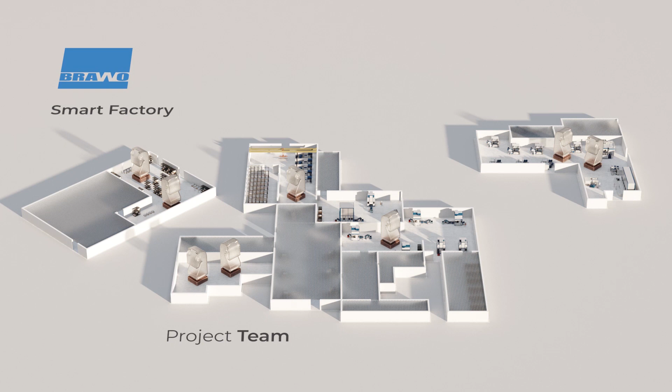The Smart Factory project aimed at increasing the digitization of processes, technological innovation, and corporate sustainability was launched in Brawo in June 2021. A dedicated project team was set up to achieve this ambitious goal. 8 project managers were identified from different corporate positions. They all have different skills and experiences and share a strong attitude for innovation.

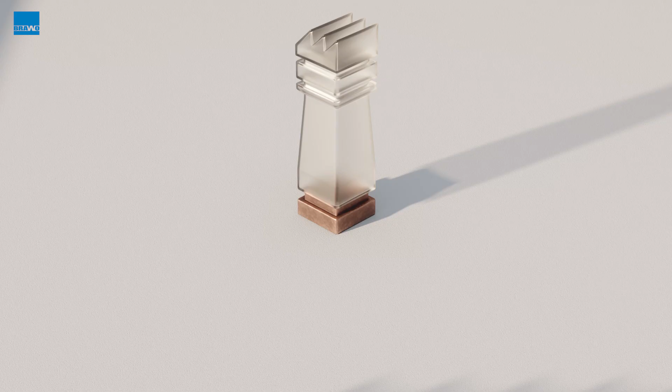Through periodic meetings, new proposals and the status of projects in progress are shared with the company management. The main projects of the Smart Factory regard 5 macro areas: energy management, production and maintenance, paperless documental management, communication and management flows, business intelligence. Each macro area contains several sub-projects for a total of over 50 dynamic projects that may change over time. Let's now see in detail some of the projects that are contributing to the transformation of Brawo into a smart factory.

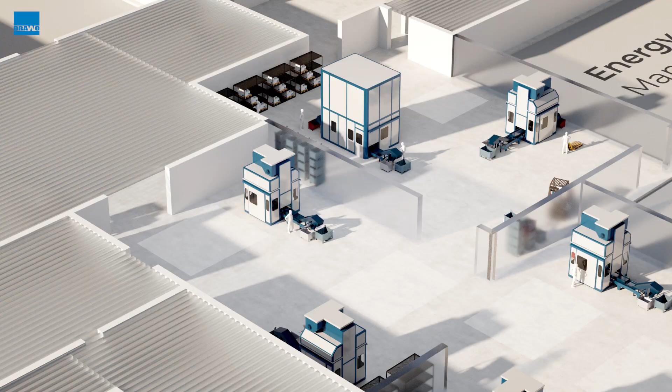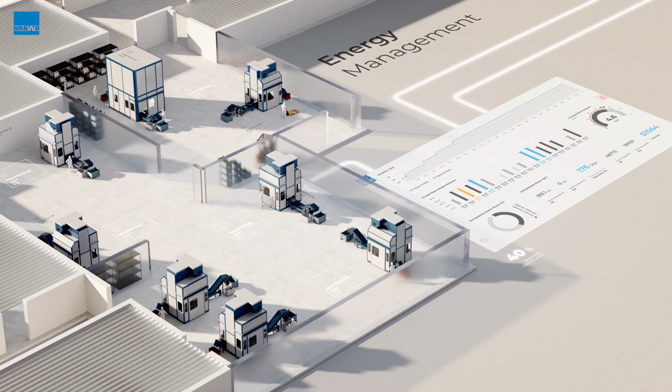The installation of specific sensors allowed to intensify the collection of data relating to the individual equipment and company areas' consumption. The information collected is monitored and analyzed using special software and apps that are able to intercept consumption anomalies and send alert notifications to the relevant personnel. This allows Brawo to promptly intercept malfunctioning notices and intervene to resolve them.

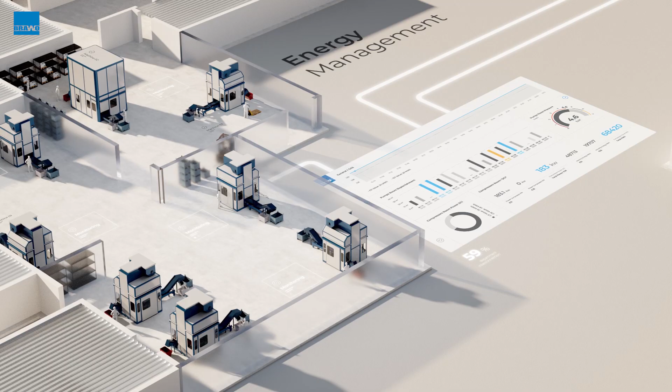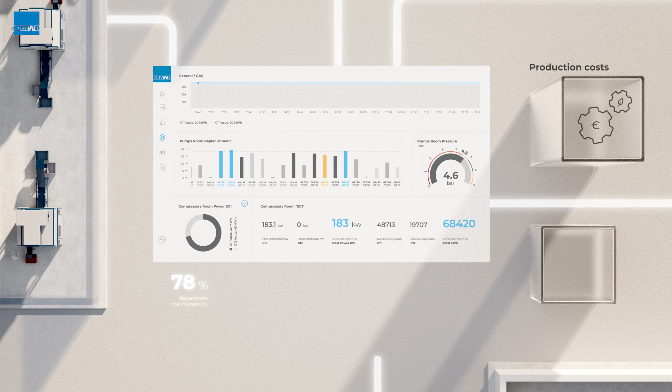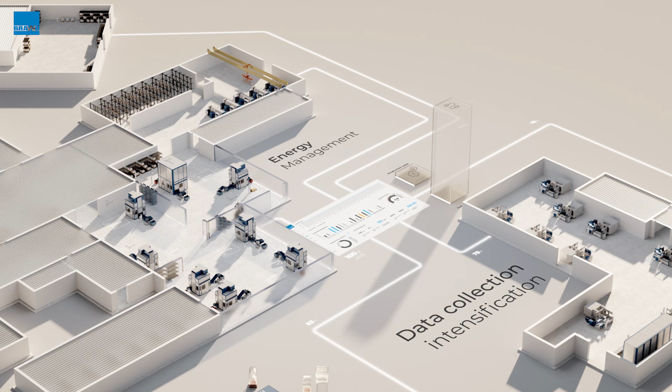It's also possible to analyze in detail the data relating to corporate consumption of utilities by intercepting inefficiencies and implementing improvement actions aimed at reducing production costs, environmental impact, and increasing sustainability. Considering the growing strategic importance of these topics, Brawo scheduled an intensification of the collection and monitoring of data relating to company consumption, including an ever-increasing number of company equipment and areas.

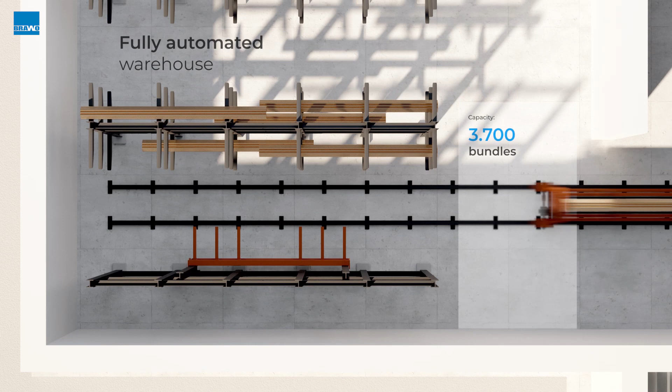Another fundamental aspect for Brawo's production process is represented by the management and handling of the raw material. A fully automated warehouse with a capacity of up to 3,700 bundles was installed. Through the interface between the warehouse management software and the company MES, it is now possible to manage in a completely automated way the handling of the raw material.

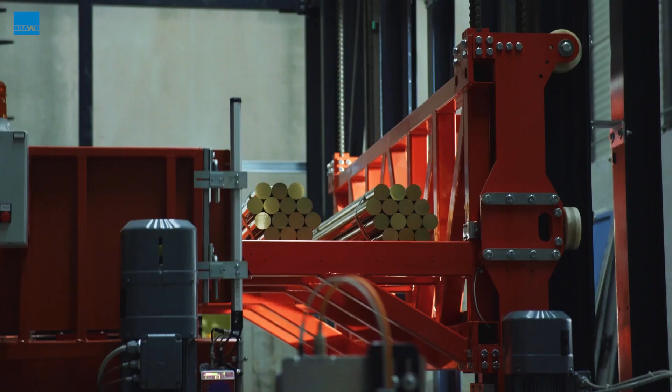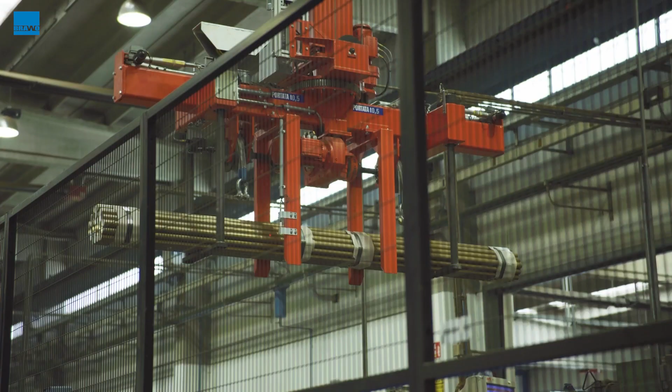In relation to the production needs, the bar bundles are picked up and positioned on the machine for the cutting operations without any operator intervention. Thanks to this project, it was possible to eliminate the manual operations of the cutting machine's loading, and in general to increase the efficiency of the raw material handling and storage.

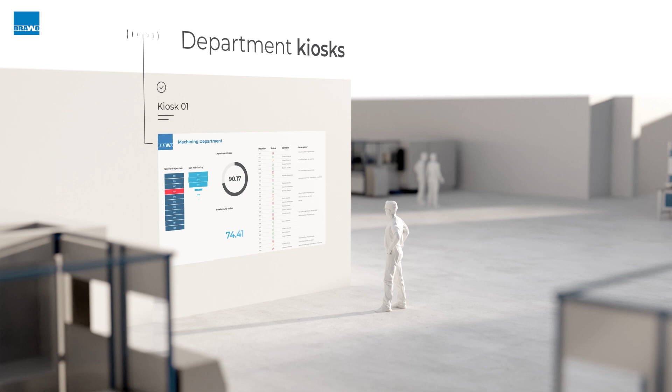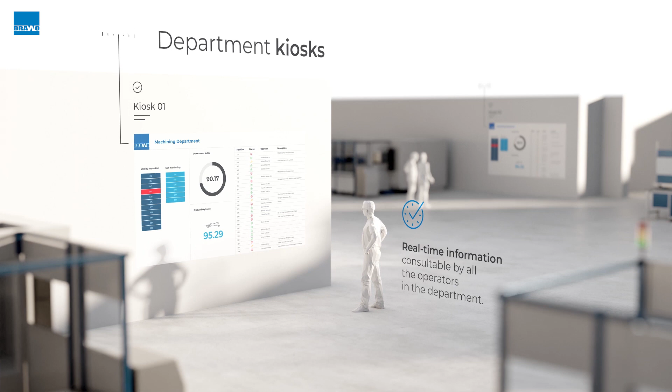Monitoring production performance is the key to achieve the company's goals. In the machining department, 2 screens of 75 inches illustrate real-time information relating to the status and performance of each machine. An 80-inch touchscreen monitor, which can be consulted by the operators, displays the trend of the department indicators in real time.

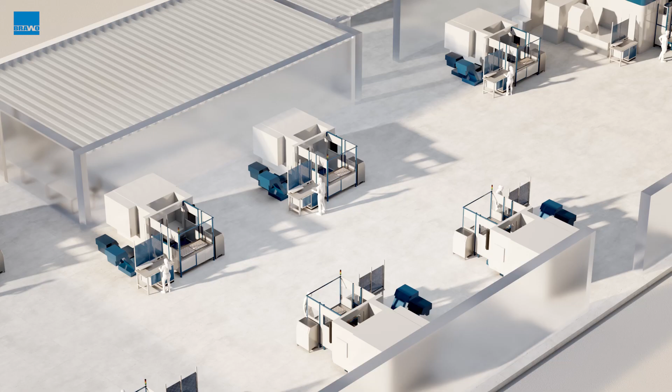One of Brawo's key goals has always been the efficiency of production activities. Over the years, many investments were made in industrial automation, mainly focused on machine loading and unloading activities. This allowed operators to be relieved of manual activities with little added value in favor of monitoring and control activities to increase product quality.

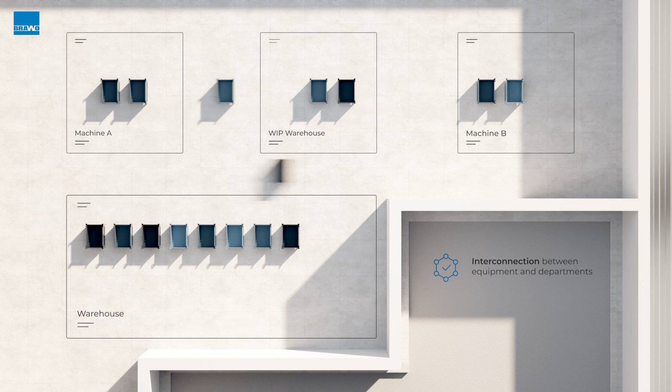This is the direction that will also be followed for the next few years through the installation of further automations. The focus of future projects will be the interconnection between equipment to automate the management of the department's production needs and to increase the work-in-progress material handling and storage efficiency.

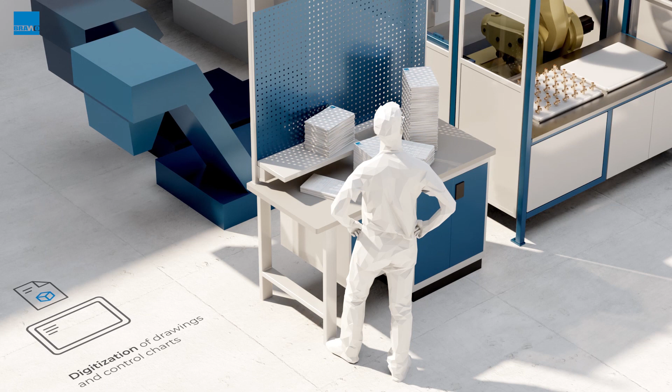Besides the automation of manual operations, thanks to the Speaking Drawing project, the digitization of drawings and control charts was achieved in the machining department. All the information relating to the checks carried out in production are now available within a single software. This makes it possible to intercept process issues or quickly carry out detailed analysis in the event of anomalies and nonconformities.

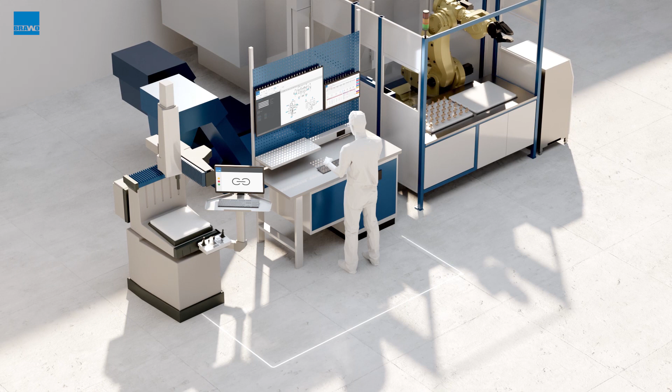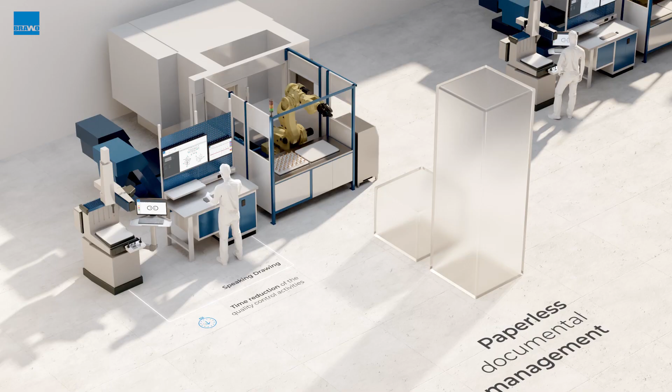Special interfaces were developed between the coordinate measuring machines, CMM, present in the department and the Speaking Drawing software in order to automate the recording of most of the dimensional checks. Thanks to the Speaking Drawing, it was possible to reduce the time necessary for the execution of quality control activities and consequently increase the number of checks performed and anticipate the identification of nonconformities.

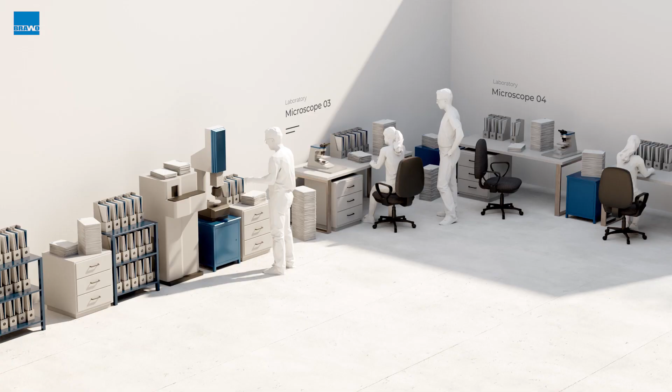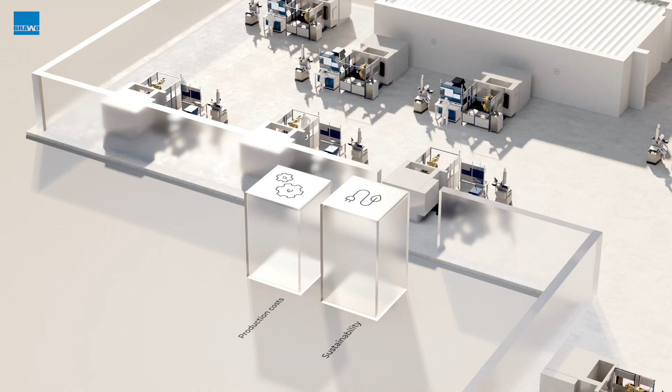To complete the Speaking Drawing project, the digitization of the test reports issued by the metallurgical laboratory and the inspection certificates issued by the quality control was added. The reduction of the paper used and the related manual compilation activities led, as it is easy to understand, to an increase in the efficiency of the operational activities.

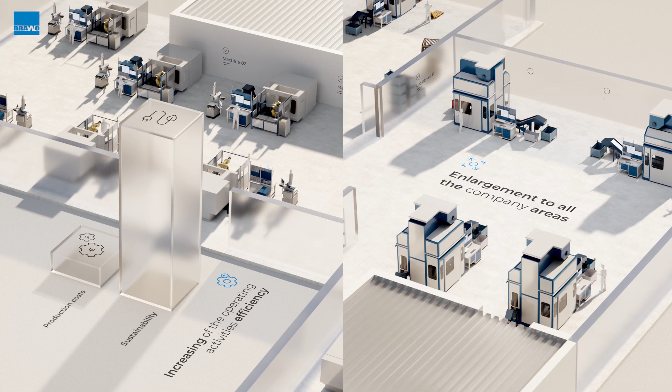Considering the results achieved in the machining department, the Speaking Drawing project will be implemented also in those departments that today still operate with traditional drawings and control charts. In parallel, the complete digitization of delivery notes is also under development.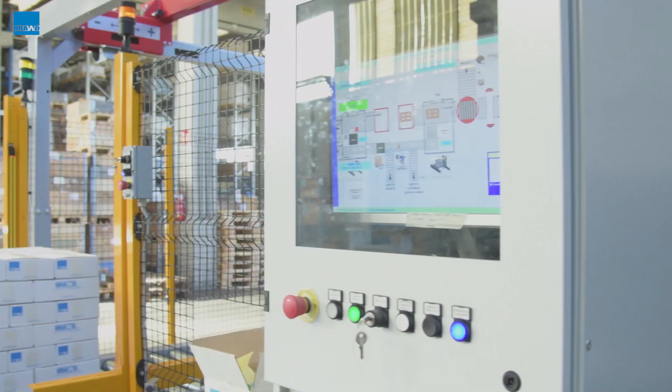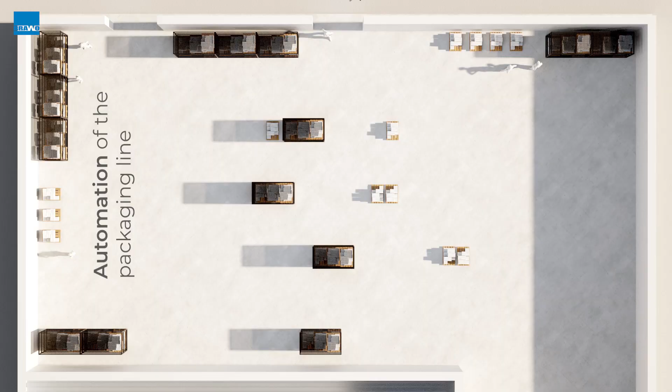Additionally, the new automated packaging line was introduced. Its software allowed a significant streamlining of the information flows regarding the shipment and invoicing operations. The sales offices now have a real-time view of the goods available in relation to the unfulfilled order lines and can indicate to the warehouse which shipments to prepare. In this way, they also provide the input for starting the material packaging phase, including weighing to verify the quantities and for the automatic issue of delivery notes and invoices.

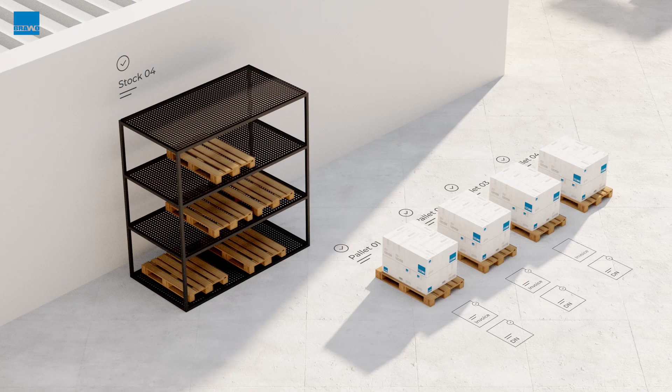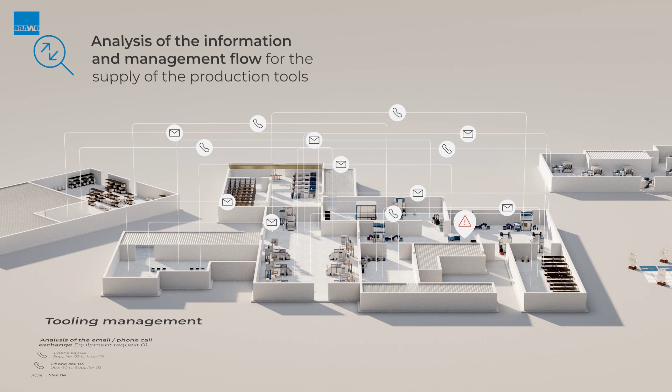Since the Smart Factory is based on the availability of clear and accurate data, the information and management flow relating to the supply of the tools is under analysis. Such flow to date is managed almost entirely through email exchanges and/or phone calls. Through the implementation of the corporate MES, the entire tooling management process will be managed in a smart way.

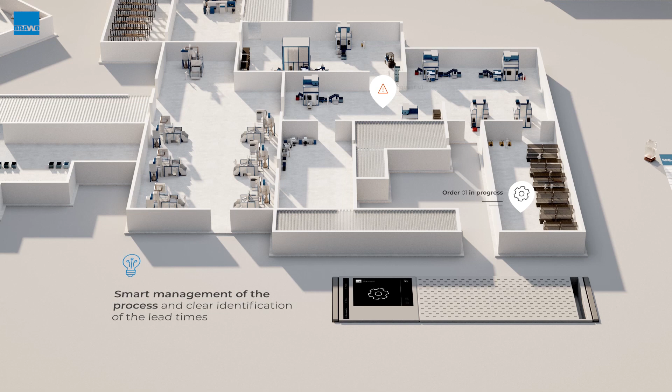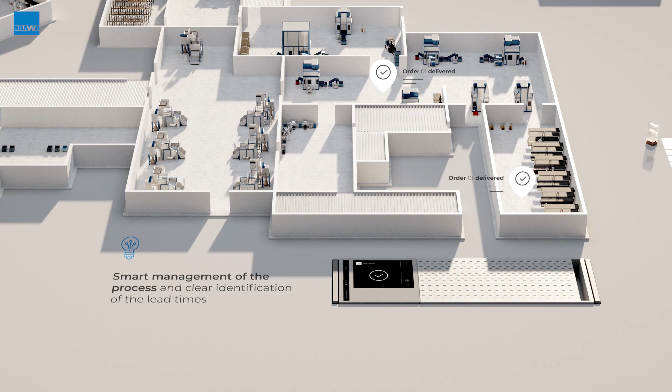All the personnel involved, planning, engineering, production, purchasing department, will be provided with a clear indication of the supply lead time and workloads for the punctual scheduling of work orders. The digitization of the information flow will also make it possible to monitor the performance of both internal and external suppliers to identify inefficiencies and opportunities for improvement.

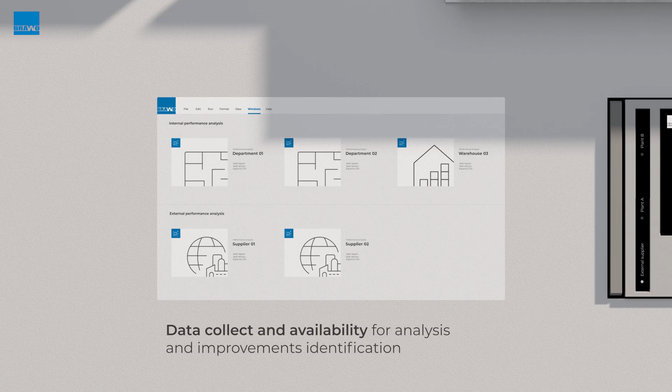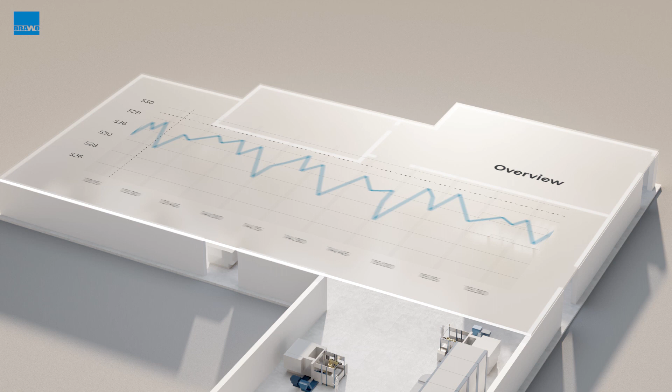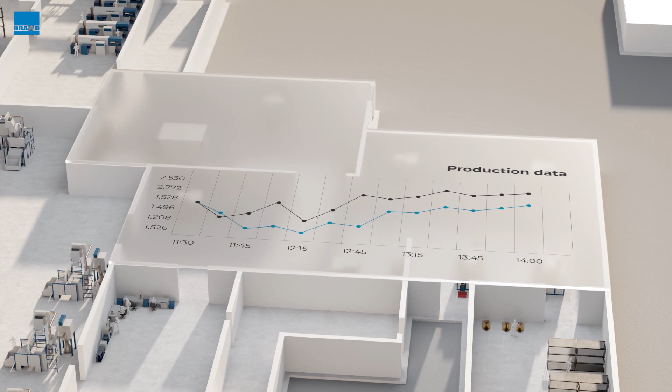Finally, as information represents the basis for management and strategic analysis, business intelligence systems will be developed. This will provide a representation of the single process's performance, becoming an important support tool for the company management. The clear and immediate vision of this information, therefore, represents an important support tool for strategic analysis and the management of corporate processes.

Brawo, forging your ideas into innovative solutions in a smart factory.